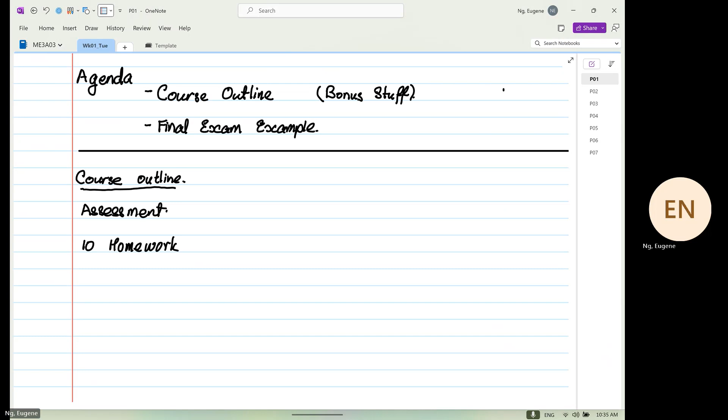Okay, so course outline, let's look at the assessment. Assessments, you are going to get 10 homework, based on completion. Now, when I say based on completion, do them, okay? If you don't finish it, the TA will realize that you did not finish the question, and you're not awarded full mark.

Are we clear? Okay, and don't just, I had a lot of complaints for doing this for 2Q. Some student just write the first line and expect full mark, okay? Come on, seriously, at least complete the question, okay, if you could. So 10 homeworks that you will get.

Then you're going to have term test 1. And if I'm going to guess, it's going to be early February.

Then you have term test 2. Oh shoot, I'm sleeping, early February. I told you, right? I'm having deja vu, right? I'm like teaching 2Q, you know. Term test number 2 is going to be early March.

And then you're going to have your final exam. This is worth 10%. This is worth 20%. This is worth 20%. And this is worth 50%.

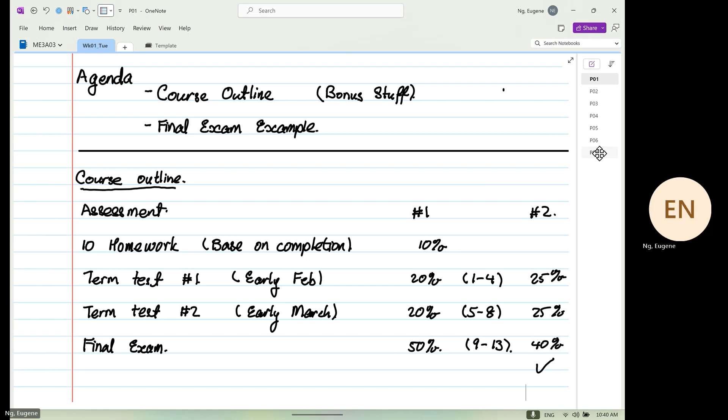So let's look at this question. Okay, it's posted on Avenue to Learn.

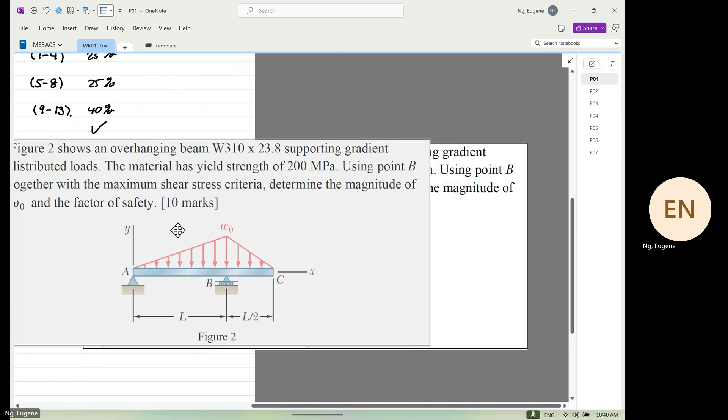This was a question given in winter, just last time I was teaching, winter 2023.

So if you look at the question, figure 2 shows an overhanging beam, W310. The material has a yield strength of 200 megapascal. Using point B together with maximum shearing stress criteria, determine the magnitude of omega naught and the factor of safety.

How many chapters in 2P you see in there? Anyone? I know you have not seen shearing stress criteria before. This is your first time. You all learn how to calculate factor of safety? Yes or no? Right, you all learn how to calculate.

Okay, let's start from factor of safety. Now, by no means is this course going to, what is the word should I use, by no means is this course going to make you feel small even while you learn 2P04. No, that's not the intention. I'm going to show you the detail that you have to know in order to do a proper design stress analysis.

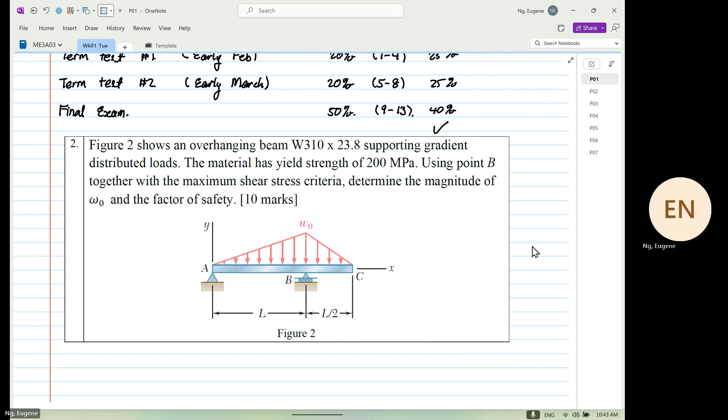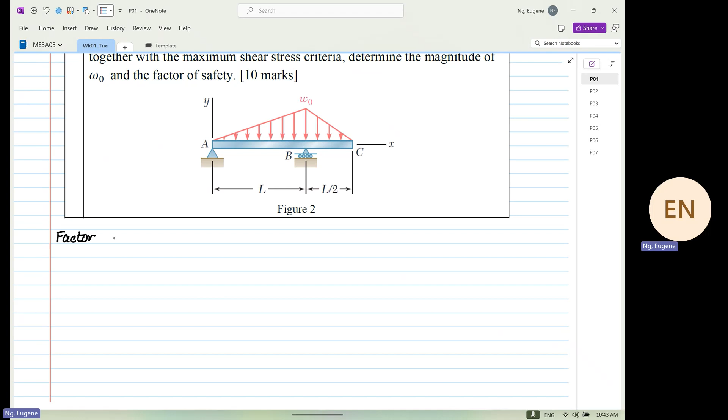Okay, let's look at factor of safety. Can someone tell me what is the formula for factor of safety? Anyone? Yes. Huh? No, give me something better than that. Anyone? Yes. The yield strength over allowable strength.

The yield strength is a what? Material what? Behavior. This is what we what? We measure. The allowable strength is based on the what? Analysis from 3A03 or 2P04 or in future 3E03. It's what you calculate. Okay, it's what you calculate.

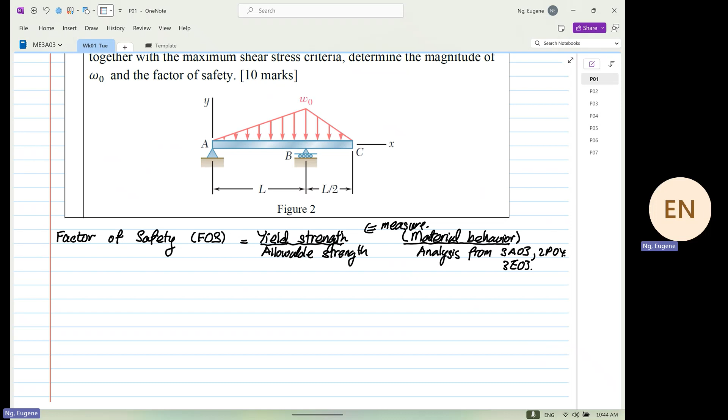Now, if we refer back to the textbook, which I hope all of you will illegally download, did you all use this textbook in 2P, yes or no? Yes? No? Don't know? Not seen the textbook before? Okay, it's okay, I understand.

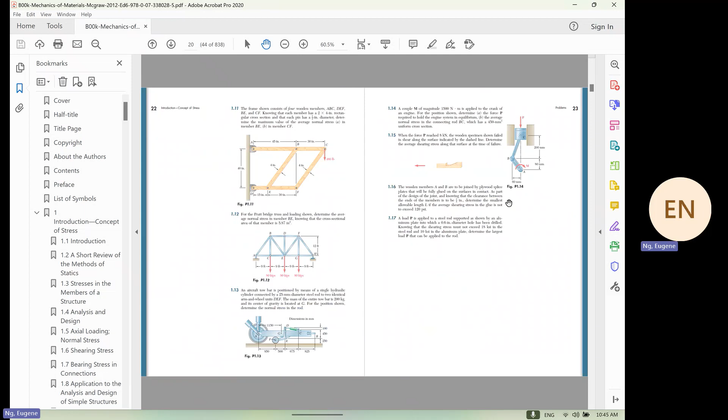Now, so you look over here, you zoom in, and see what do we get. The factor of safety is equal to what? This is from Beer and Johnston. The factor of safety is equal to ultimate. Okay, so this is copied from the textbook.

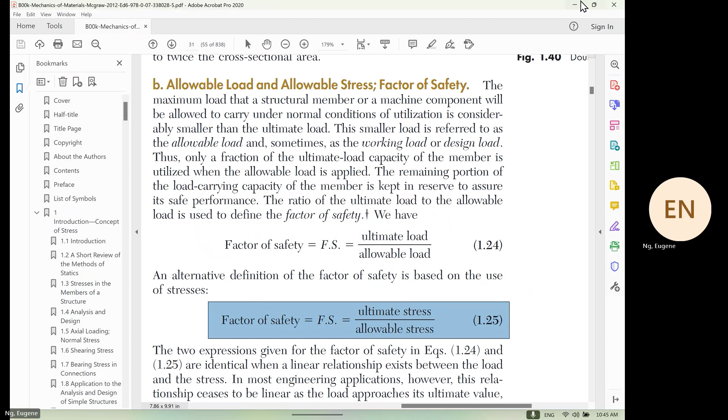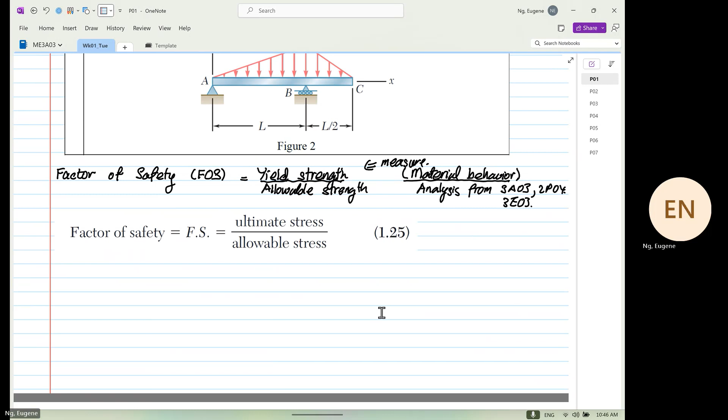Right, this is from the textbook. Is our formula the same? Is it right or is it wrong? Why do you say it's yield? Yeah, but what is given in a textbook is what? Ultimate. Dr. Koshi taught you all ultimate, yes or no, in 2P04. So who is right and who is wrong?

That's what a university degree is all about. You have to know when to use what formula. Both are correct. So some of you like, huh? Why both of these are correct? Okay, why both of these are correct? Anyone? Why both of it is correct? And both of it can be wrong.

Some of you say, okay Eugene, I'm going to retract my money. I'm done, I'm not going to take this course. You're saying sometimes it's right, sometimes wrong. Okay, I'll tell you when is it right and when is it wrong.

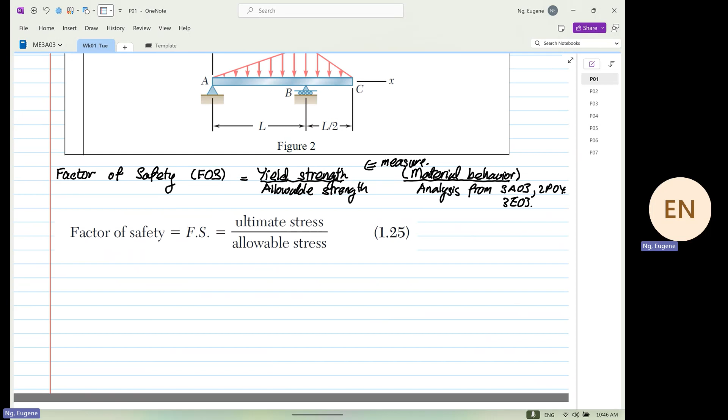So now I'm going to sketch the stress strain curve. Everything we do goes back to fundamentals. Okay, so there are two materials over here. And then the next material that I'm going to sketch, we'll just do this. Okay. The one in black is known as a ductile material.

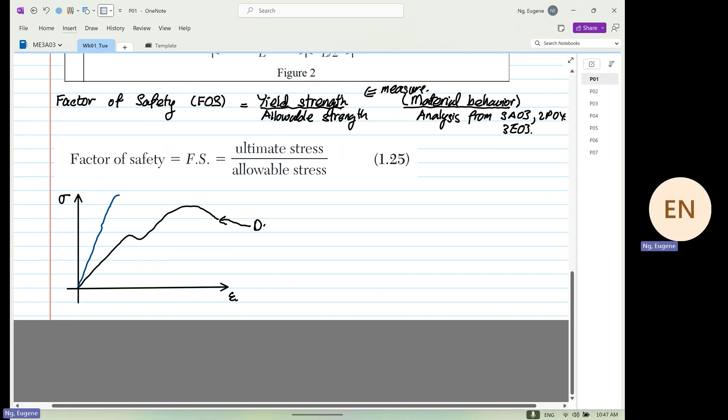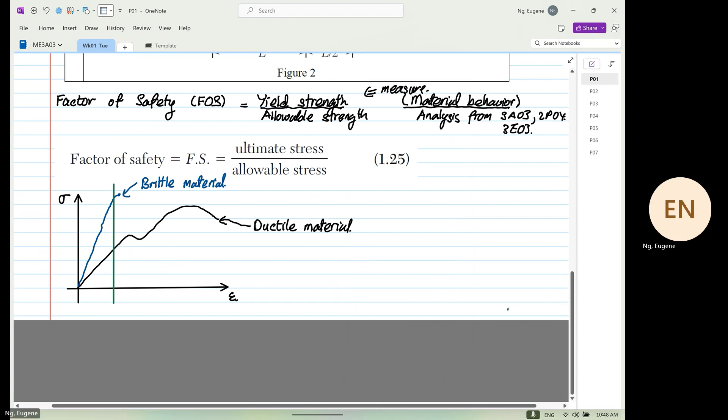The one in blue, not very good Eugene, come on wake up, the one in blue is for brittle material. So let's focus on the brittle material. Okay, so the brittle material, I'm going to draw a green line. Okay, I'm going to draw a green line. I'm sorry, I could not remember, did I share screen? Yeah, I did. The green line represents the transition where...